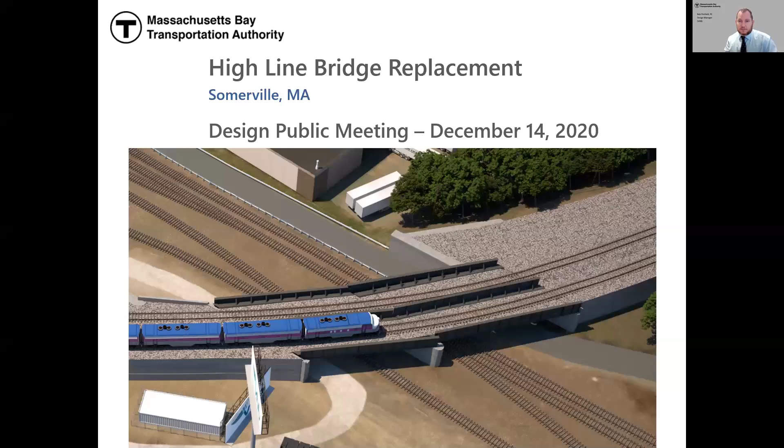So next slide, please.

As Mike mentioned, meeting with you today is Mike Ryan, the MBTA project manager, program manager for this design build project. Gary Orlando is our project manager with Barletta Heavy Division, myself, and then Andrew Burkholder, who is our senior engineer, my counterpart here at VHB.

Next slide. We're going to discuss a few things at this meeting. First, we're going to provide a quick overview of this project and how it fits within a larger context of the design build program with the MBTA. We're going to get into some specifics on the bridge itself, discuss the site location, existing conditions, the project needs and goals, talk about the bridge layout and its design, our proposed construction staging, and how traffic would be impacted during construction, and then discuss in a rough sense the project schedule.

We'll discuss some other additional opportunities for public outreach, and then of course take any questions that you may have.

Next slide, please. So as we've mentioned, this particular bridge is one of 6 bridges that are combined into a single design build program. We've got a bridge being replaced in Weston, one in Wellesley, one in Melrose, one in Lawrence, one in Lynn, and of course the one in Somerville, which we're here to talk about tonight.

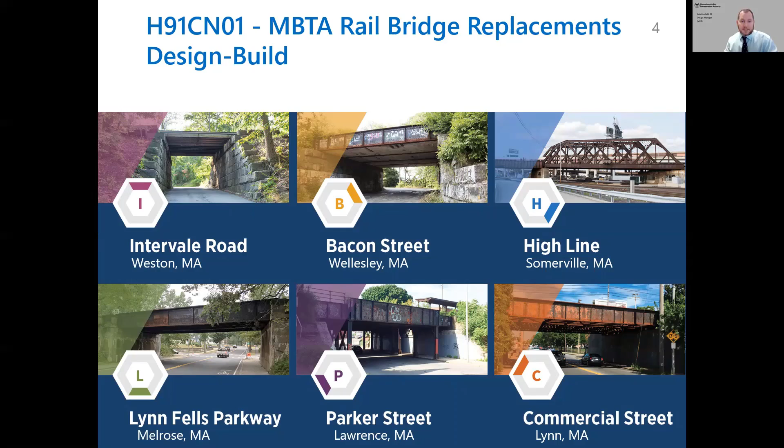Next slide. These 6 bridges are located at various locations within the MBTA's commuter rail system. High Line, you can see it kind of in the center of the screen, in Somerville, just north of Boston.

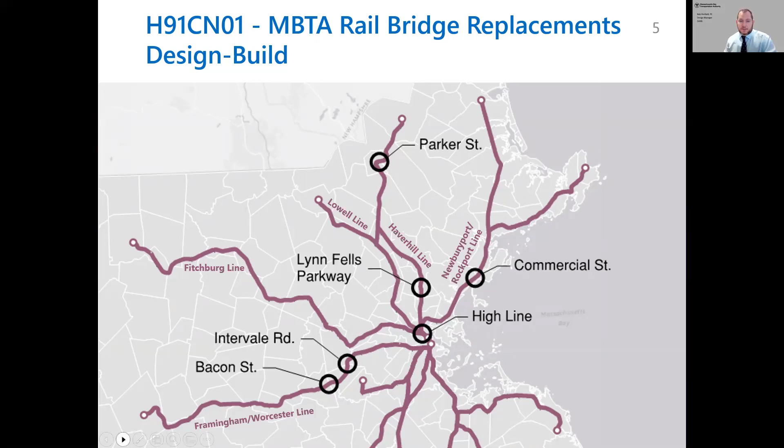Next slide, please. To give you a quick overview of the timeline of this project, it started back in 2016. Various consultants were working with the MBTA, progressing the preliminary design of these bridges, kind of individually. In 2017, the MBTA's Capital Delivery Group was looking for an opportunity to accelerate the pace of their projects, and they decided to take those 6 individual bridge replacement projects and combine them into a single large program. They also opted to use design build as the contract procurement method as a way to accelerate the project and to encourage more innovation. So from 2018 to 2019 was the design build procurement process.

Ultimately, 9 teams proposed, and of those 3 were shortlisted. Ultimately, the Barletta VHB team was selected as the best value. We had the highest tech score and the lowest price. So from 2019 to 2022, we've been progressing the final design and the construction of all 6 of these bridges. While the specific schedule for each bridge varies, they all fall within that same 3-year period, with the final program being complete approximately August of 2022.

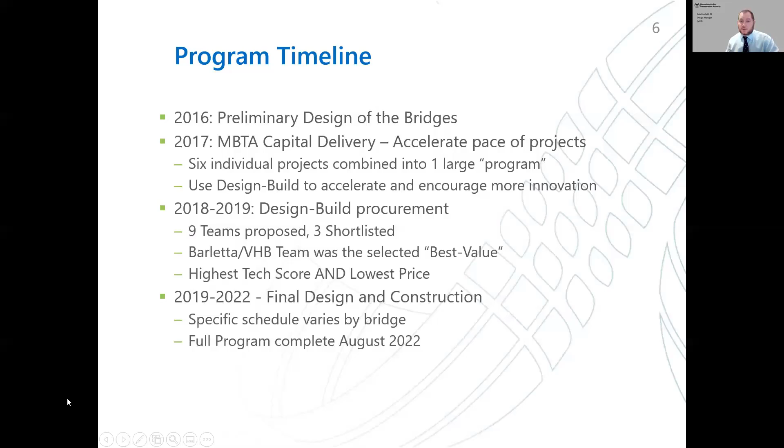The MBTA bridge carries the New Hampshire main line over the freight rail system just west of I-93 and the Leverett Connector. You've probably seen it if you've ever been on the highway. It's just north of 3rd Ave and just northeast of the UPS Customer Center, within Somerville, near Inner Belt Road. We can go to the next slide.

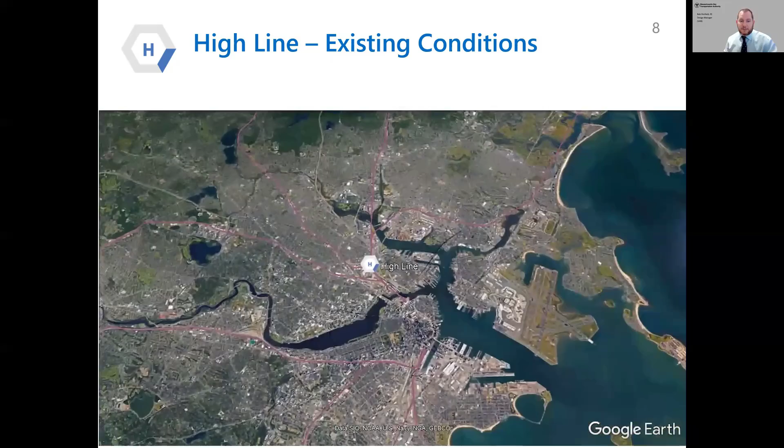What we've got here is an aerial view. We're going to zoom in. You can see some of the existing conditions and the site elements that have influenced our design of this project. We'll zoom in here and I'll walk you through those details.

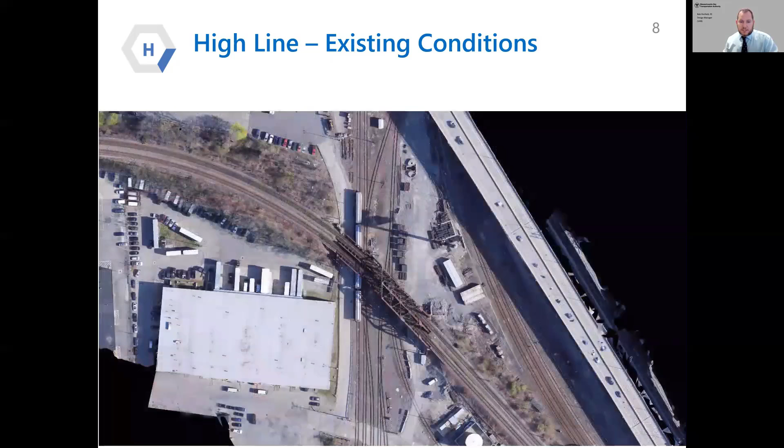At this point, I'm going to turn it over to Andrew Burkholder, who's going to walk through some of the more specifics on this project.

As Mike mentioned, the existing bridge was built in 1927. It's a two-track structure, as you can see in the upper right picture. One span consists of through truss, and another span consists of steel through girders, and it's supported by a center pier and concrete spill-through abutments.

Below the tracks, we have 4 freight rail tracks and also an access road, which you can see in the lower left-hand picture. There's significant utilities at the site. The bridge itself carries some signal cables, and there's a multitude of overhead and underground utilities on site, which we'll illustrate in just a minute.

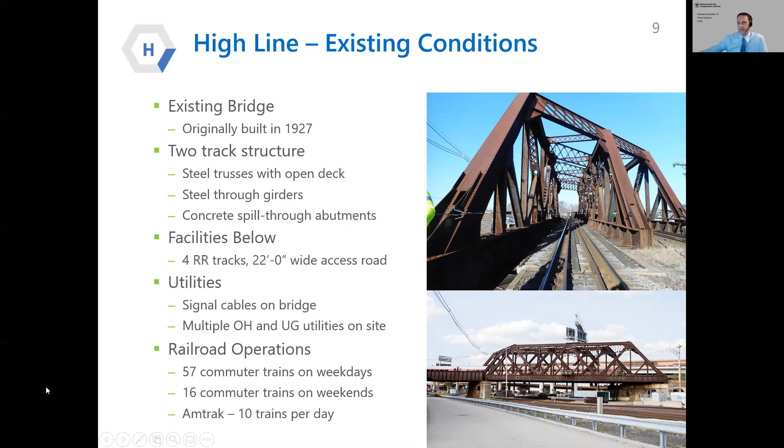This project is needed because the existing bridge is in poor condition. In the MBTA's continuing effort to provide a safe and efficient transportation system, this bridge was identified as one that needed to be replaced to maintain that state of good repair for its infrastructure.

The project goals are to maintain that state of good repair for the infrastructure, replace this structure with one that will provide at least a 75-year design life and be resilient. We want to complete this project while minimizing the impacts to the abutters, the commuter rail riders, and the local businesses in this area.

So to do that, we're going to have a complete bridge replacement. As Bob mentioned, this bridge will be built offline, so the tracks will be realigned to allow us to build this bridge just to the north of the existing structure, minimizing disruption to commuter rail traffic.

The new bridge will be a 2-span structure with new abutments and a new pier, and it will be a through girder bridge, which we'll show in just a minute. We don't anticipate any impacts to the existing right-of-way.

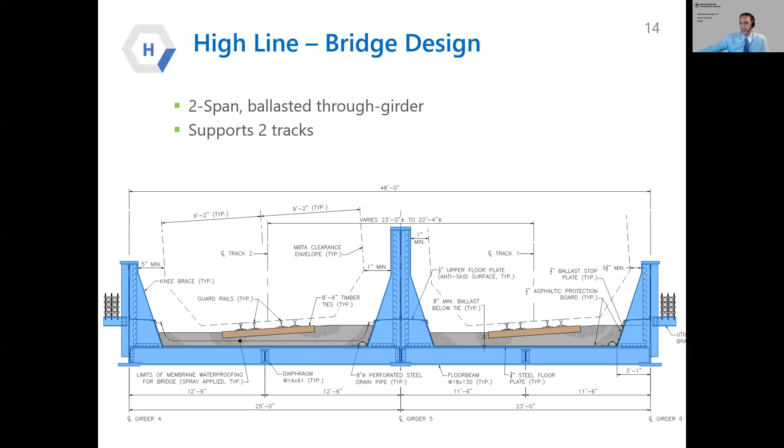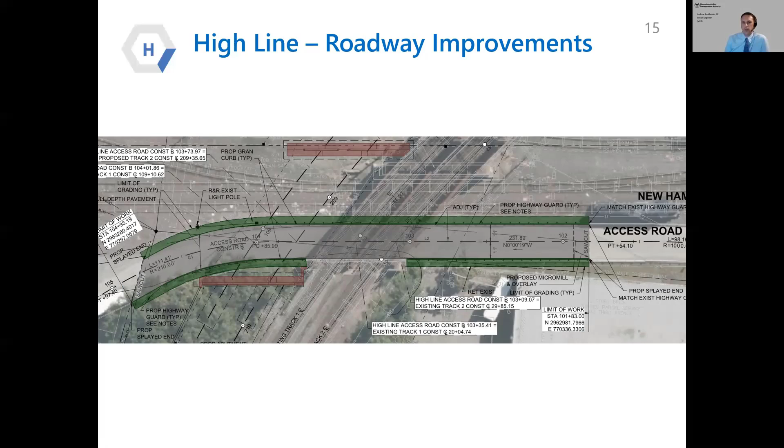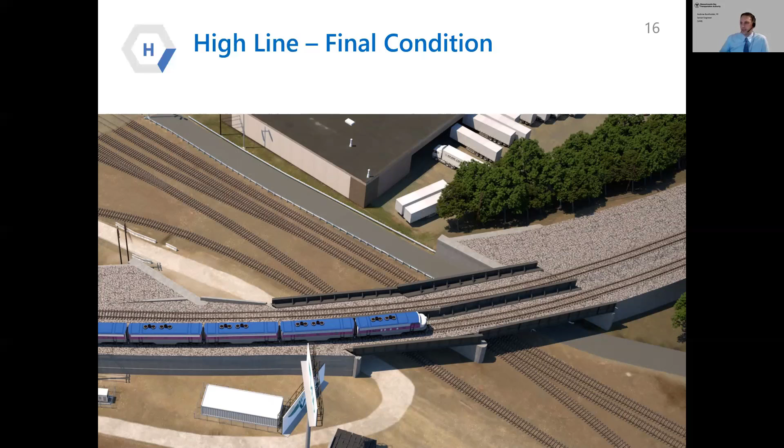Now we'd like to play a short animation that will go through the construction of the bridge at this site. So we're going to get a little dizzy here.

We start off with an overhead view—the same general view shown earlier with Interstate 93 on the right. This is a commercial industrial area of Somerville. You can see all the rail infrastructure around it and the freight rail tracks passing beneath, and the access road connecting to 3rd Avenue on the left-hand side that runs under the bridge.

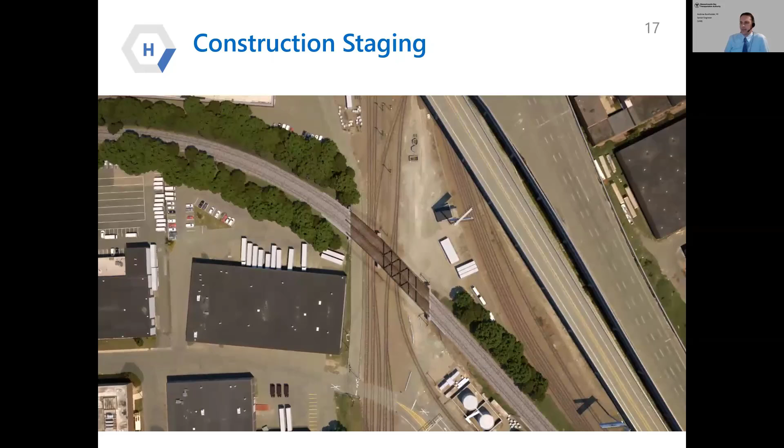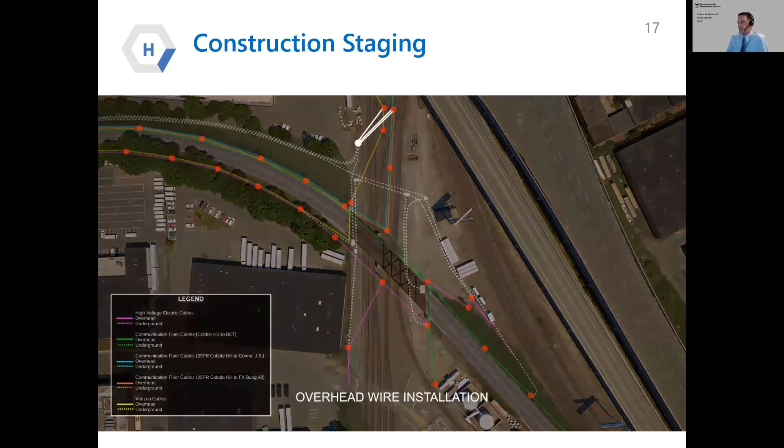As mentioned, there's a significant amount of utilities, both overhead and underground, and some running on the bridge. Our first step is to get those out of the way so we can build this bridge offline to the north of the existing bridge without utility conflicts. Here we're illustrating the multitude of utilities here and our plan to relocate them prior to construction on site, so they're out of the way and we're not having disruptions.

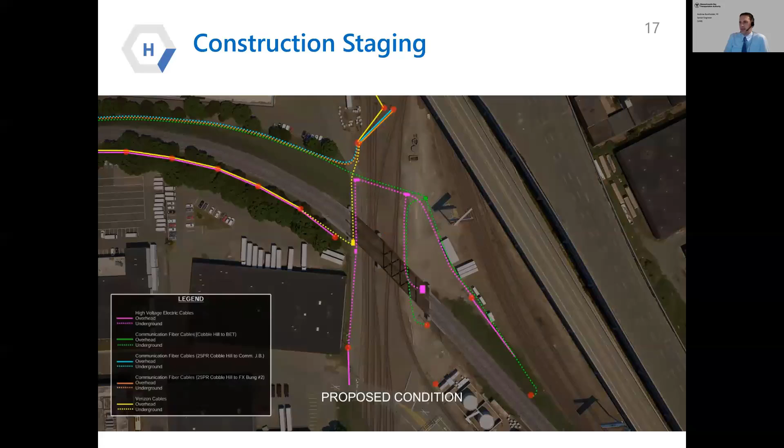Once the utilities are out of the way, mostly underground, the next step is to install a gravel access road to reach some electrical equipment the MBTA has at this site. Then we would start driving piles for the substructure—here you can see driving piles for the abutment, repeated for one abutment. Then we go between the tracks and do the same operation for the new pier, and on the other side put in the piles for the other abutment.

Once that's complete, we can construct the concrete abutments and piers—you'll see these come in pretty quick. This will support the new bridge, and then the new approaches are constructed. These allow us to tie into the existing tracks and build the bridge offline to the north.

Next step is to assemble the superstructure, each span. Here we're showing the beams in blue just to highlight them for the presentation. You can see the cranes installing the first girder, then the floor beam and deck plate system and panels.

Next, they bring in the center girder and repeat the process with the floor beam and deck panels. We don't show trains running on the commuter tracks, the active tracks, but this is all occurring while the commuter rail tracks are in service. Now one span is complete and the process repeats for the second span.

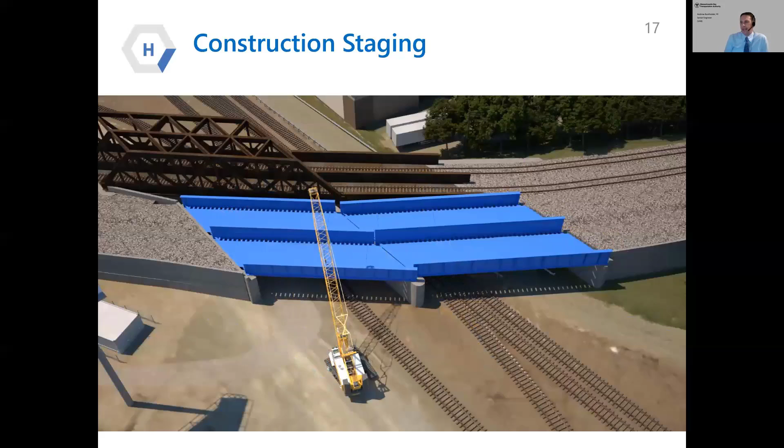Once the steel superstructure is assembled, the view spins around a bit to show final completion of the steel detailing. Once that's complete, we can install the ballast and the new tracks. You can see the final steel detailing being installed, the new ballast, and then the new tracks installed. At this point, the new bridge and approaches are complete, and trains can be shifted over to the new alignment over the new bridge.

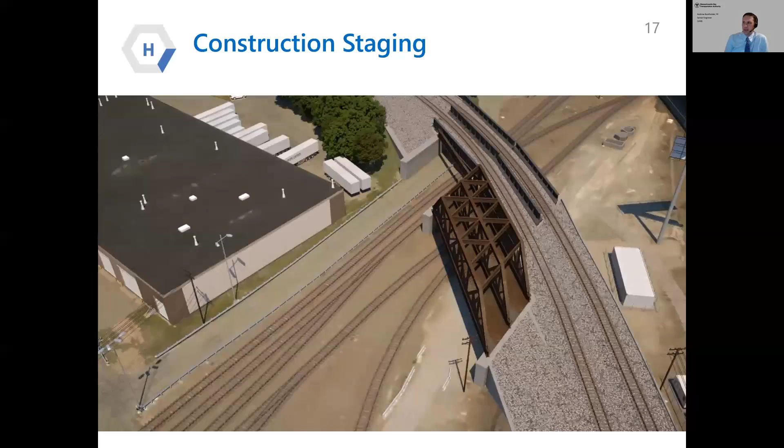Once those trains are shifted over and train traffic is shifted over, this allows us to demolish the existing bridge. The idea is we would remove the existing superstructure—the steel through girder span, the steel truss span—and then the center pier would also be removed. The existing abutments will remain in place to support fill.

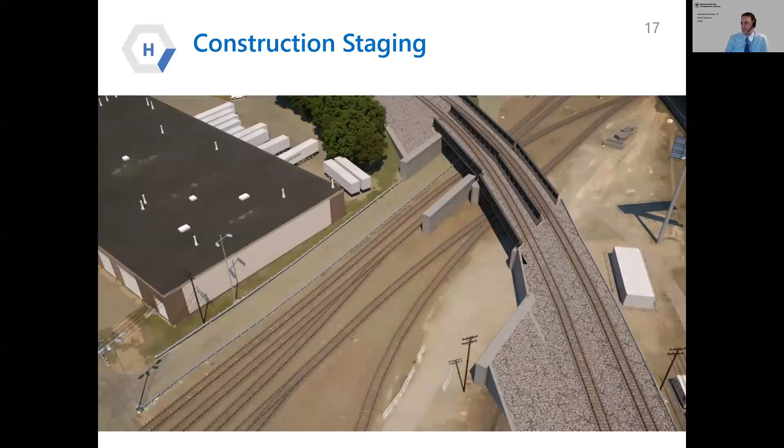And then the final step is to repave that access road, as I mentioned. And then at that point, the project is complete for this location.

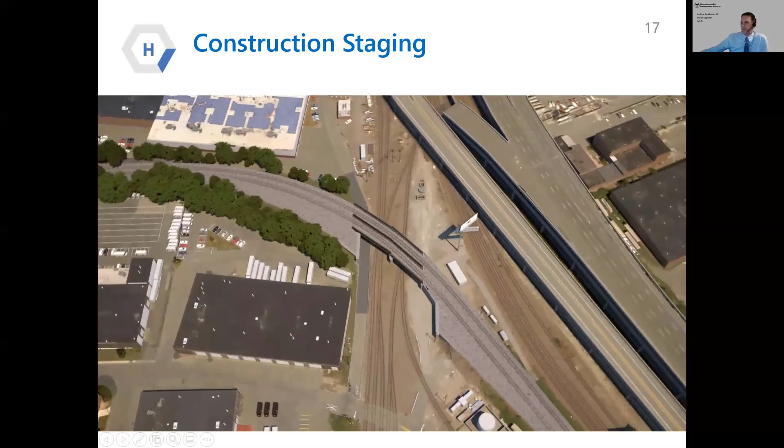Thanks, Andrew. So as Andrew indicated, the construction of the new bridge will be adjacent to the existing bridge. This is intended to minimize impacts to the commuter rail system in general, as well as the traveling public.

As you know, this location is not located over a heavily traveled roadway. It is an access driveway to connect to Metro Pipe and some other adjacent businesses. But recognizing that the Inner Belt Road is going to be used as the primary sign detour for folks to get in and around the site and the surrounding neighborhood.

So we've illustrated this on this detour plan here. If you were traveling along that access road / private driveway, the sign detour would have you continue along 3rd Ave, go underneath the bridge at Inner Belt Road, and then back around. Of course, if you're coming from the north, it would just be the opposite. But again, we're not really having any impacts to the traveling public essentially here. This is the sign detour that we would be implementing in advance of construction, for the public and for everyone to see.

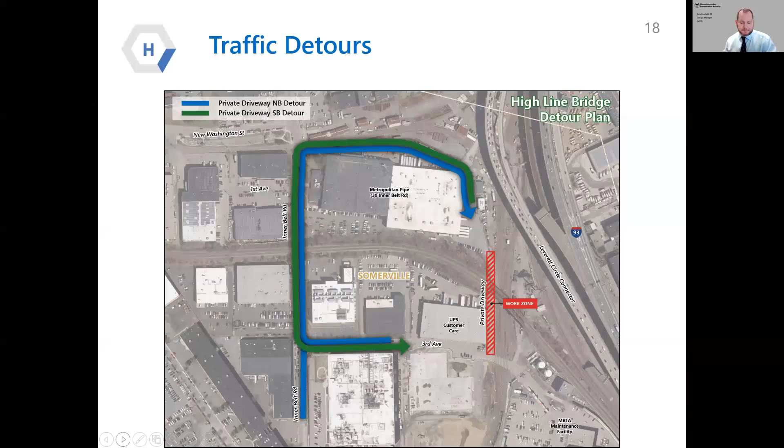Our construction schedule will be as follows. Some of the initial site clearing has already happened, clearing some of the older trees and brush in and around the bridge approaches. Some additional follow-on site prep will be starting up spring of 2021. The foundation work, as Andrew illustrated, will happen winter and early spring of 2021 as well. The construction of the new bridge will happen between spring and fall of 2021, with the approach wall, embankments, and track construction continuing through spring and summer of 2022.

At that point, we would have shifted the tracks over onto the new infrastructure, and then demoing the existing bridge would happen in fall of 2022. And again, the last part of this project, the site cleanup, repaving of the access road, et cetera, would all be happening in fall of 2022 as well.

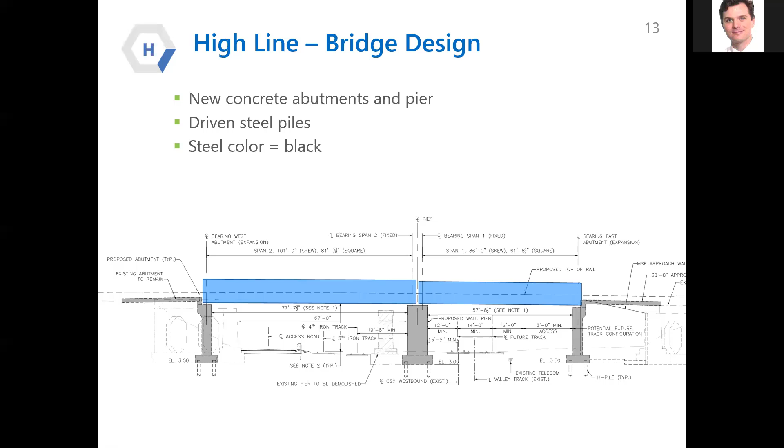The second question is completely unrelated to the first. I believe that when the project was first announced, I had heard that the very early plan was to divert the New Hampshire route traffic off onto a reconstructed freight at-grade line that parallels New Washington Street, and then hook around into the Yard 8 connection near CSX. I thought originally that was quite brilliant because that would allow for replacing the bridge while it was completely without traffic. But after inspecting this, it seems this prevents the interference at the grade level that the single track near New Washington Street would cause. I'm just curious, was I wrong about that? What I thought I'd heard about diverting to the New Washington Street freight at-grade track? Or if I'm not wrong, how was that eliminated in favor of widening the embankments?

Thank you for the question. I may turn this over to Bob - he has a little more history on the project than I do. I'm not sure if you're familiar with that, or if it was even before the design build phase. Mike, that sounds like it was before the design build phase of the project, so I wasn't aware of that having been discussed. I can't really speak to the operational challenges that might have posed, if there was actually capacity and ability to move commuter rail on that alternative route and allow this bridge to be replaced in its current location. But the approach we have here does minimize impacts to that commuter rail system very well.